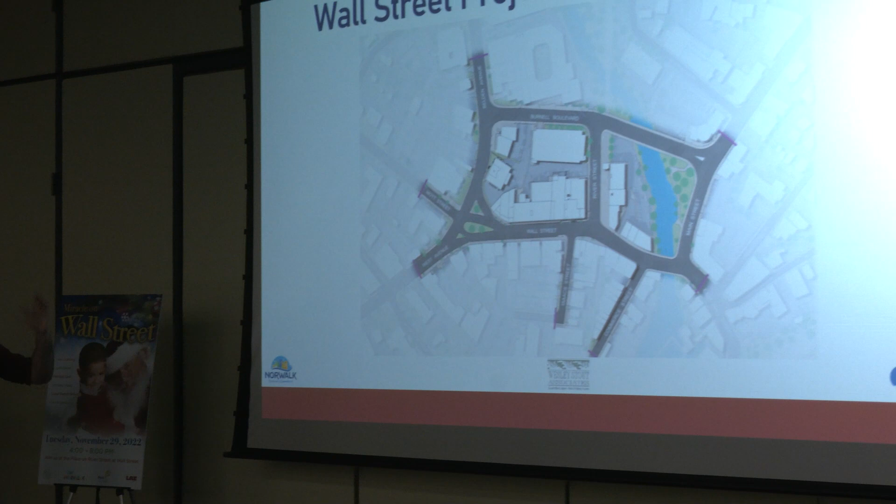On the screen you can see a project area, which might be familiar to some. For those of you that are new to the project, you'll see that this project is all about the greater Wall Street neighborhood and area. So on the left side of the screen, you'll see Belden Avenue and Wall Street. And one of the intents and goals of this project is to improve the intersection that's right outside of this library. That's challenging for many, many reasons. The project itself includes the entire corridor of Wall Street.

And also Burnell Boulevard. We recognize that Wall Street is one of the major east-west connections across the Norwalk River and one of the city's major east-west connections. So as part of this project, not only are we going to strengthen that, but we're also going to look at how we can incorporate Burnell Boulevard and bring it back to a two-way roadway to improve connectivity and mobility throughout the city. On the right side of the screen, you'll see the project incorporates a portion of Main Street between Burnell Boulevard and East Wall Street. And that's the area around Freese Park as well.

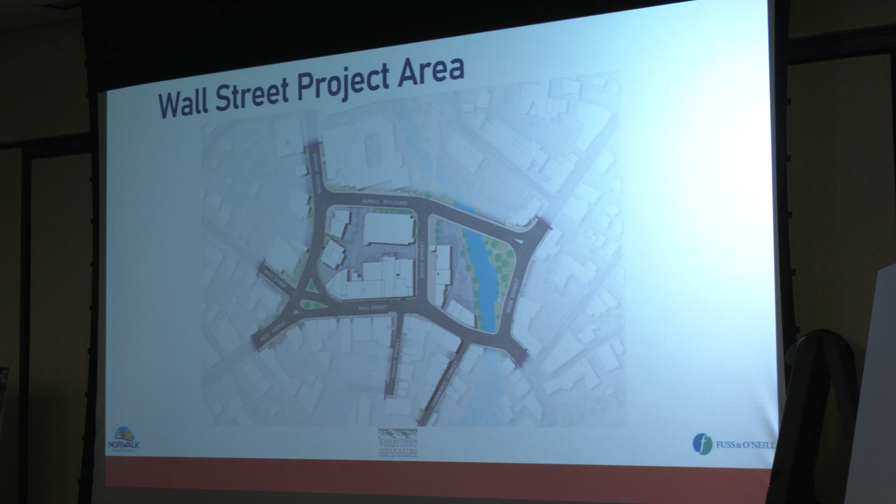And then you'll see some of the other roadways. We'll talk a lot tonight about the potential of River Street, also transformational improvements to Isaac Street, and we're also looking at basically from the train tracks all the way up Commerce Street to the Wall Street corridor. But before I move on from the slide, I did want to just talk about the history, which many people have elaborated on. When I joined the city, it was really interesting to find out that there were a number of plans done for the Wall Street neighborhood and corridor. As far back as 1986, there was a business district plan, and then it seemed like every 20 years there was a new plan. In 2003, there was a Wall Street area plan, and then as recent as 2019, there was a West and Wall neighborhood plan.

But I really wanted to emphasize that this time is really different. We have the support of the mayor, of the city's administration, our council members, and through that we've got funding to actually create design plans to hand over to a contractor. You're here tonight to provide input into what will be a shovel-ready project at the end of this process, which will conclude next year. One of the other things that makes it really different is just the amount of public engagement we've gotten. It was so fantastic to see the turnout. We had over 350 people at the Wall Street Theater, the first public meeting. And we've continued to solicit feedback throughout the process, but the energy from residents, business owners, and stakeholders has really been unparalleled.

And I think that's got the attention of a lot of different people, because you can't do this without money. So I just wanted to thank Senator Duff for bringing $3.5 million of state funding, which will be the first portion of the design plans you'll see here tonight, and that will help improve the intersection right outside the library and also make Burnell Boulevard potentially two-way to accommodate traffic throughout construction. Right? But there's also a lot of other funding. This project and this energy from the community has brought forward an endorsement from our Council of Governments that oversees Norwalk, WestCOG, to solicit another $4 million for transportation capital improvement funding.

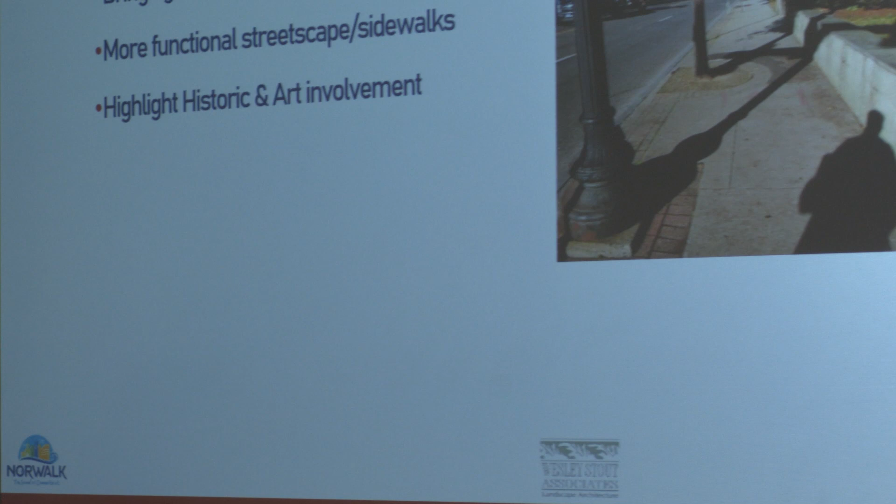So really quickly, I just want to talk about some of the larger project goals. You'll see a number of them tonight, and you'll be able to discuss a number more with our development team. But we really heard at the last meeting that everyone really wants to build on the strengths of Wall Street. So we know we have a really strong existing core group of businesses. There's many new businesses that have been opening to the city.

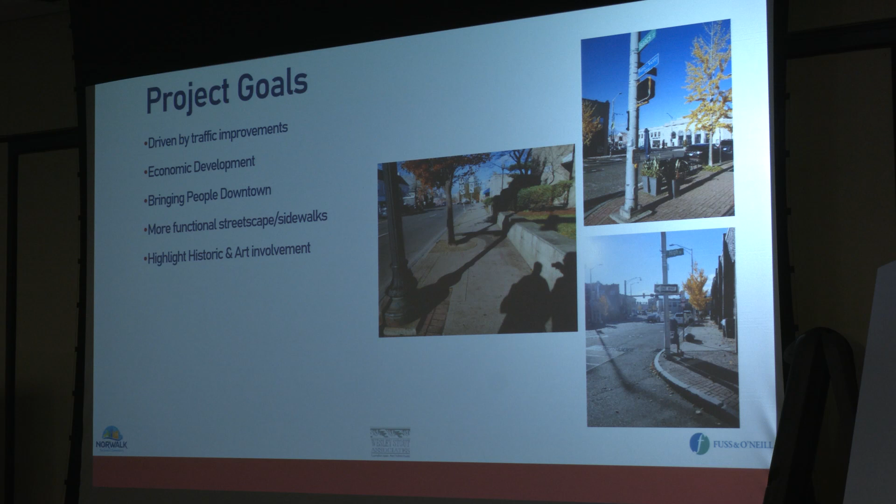And as part of this project, one of the major goals is really strengthen parking around those businesses, access, mobility, connections to those businesses, and really create space on the streetscape, right, on things like on-street dining and wider sidewalks.

Some other things that we know, the area has really great bones. So anyone that's familiar with this neighborhood will know the great public buildings we have, such as the library, which we're in tonight, other historic buildings like the theater, and then also the great open spaces we have like Freese Park. And another one of those major goals of this project is to really strengthen and build upon the assets that we have.

Another major goal of this project is really to look at how we capture the unique sense of community and spirit within the Wall Street neighborhood. Just walking the streets, talking to business owners, it became evident really quickly that this needs to be a regional destination and an attraction, and we really want to create a project that strengthens that core.

And lastly, we're transportation guys, so we understand there's a lot of challenges improving not only the through-flow traffic at safer and more village-like speeds, but also a number of other improvements at intersections and the streets along the corridor.

So you'll be hearing from a number of representatives from our team. There'll be about 6 or 7 or so speakers, so I won't go into details right now, but I did want to recognize the TMP team, Transportation, Mobility, and Parking team that's here, and that will be at the breakout sessions. Everyone from our principal engineers to our traffic signal techs to our planners will be at your disposal to talk about the project later on.

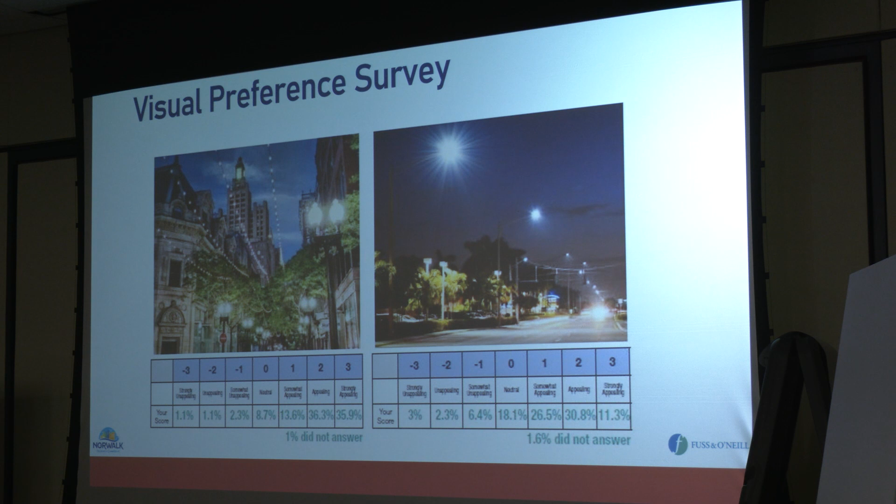So we asked folks, how do you react to things like this? Do you want to see this or not see this in your community? Whether it's cobra head sort of highway lighting, or whether it's more traditional downtown placemaking lighting. And we gathered those responses, we went through those and sorted through all those. So the charrette inputs, visual preference surveys, talking with staff, looking at all sorts of data. I want to boil it down to 8 slides. What did we hear from you? Because it's going to affect the design you see tonight that we want to talk with you about. So what did we hear?

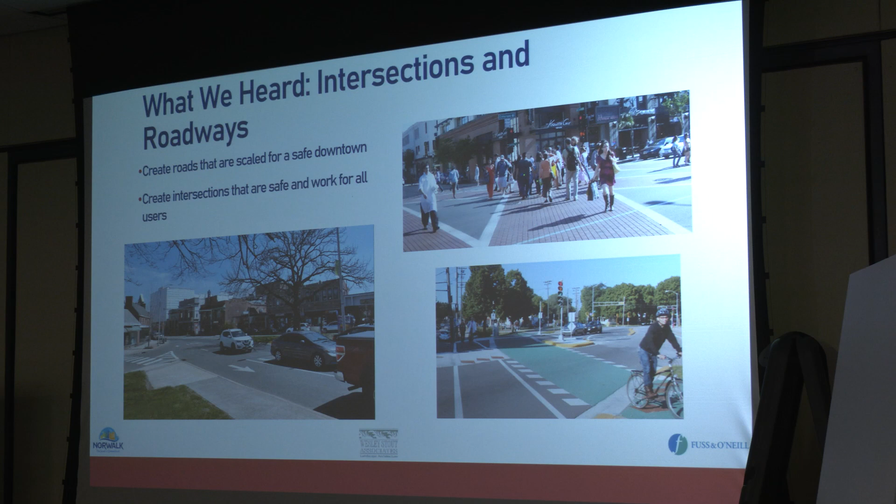Intersections and roadways. Create roads that are scaled for a safe downtown. Comments about highway scale and high speeds and not being conducive to walking or other uses. Create intersections that work for all different user types was one piece we heard. What we heard about parking. Provide adequate on-street parking for customers and visitors. It's an important part of what makes a neighborhood work. But many people don't like the existing angled parking spaces, was another piece of feedback. And then create direct, safe connections from parking facilities that already exist around the district to business areas and attractions. Because right now those connections can be indirect and feel unsafe.

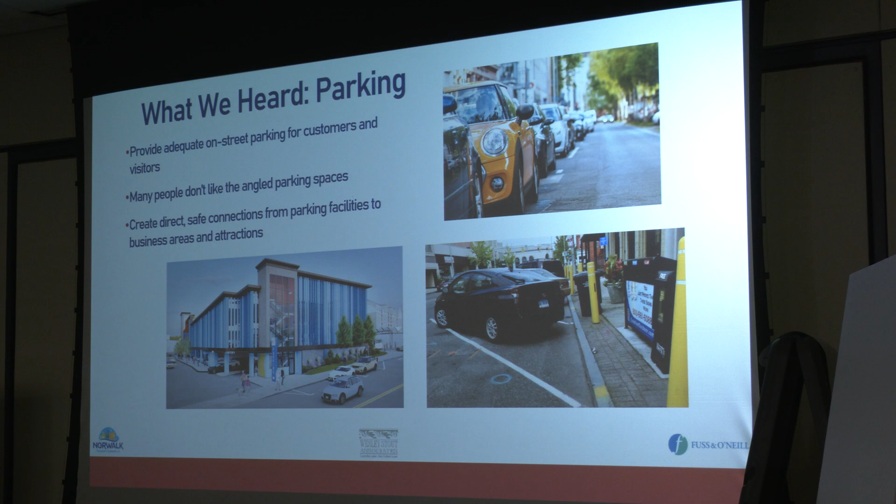Walking and biking routes, what we heard. Connect existing pathways. You've got all of these things that come into your project area, but it's not necessarily straightforward how you connect through the project area. Improve sidewalks, so they're great places to walk, but also so they accommodate outdoor or sidewalk dining. Connect existing bike trails and routes. Again, you've got some great regional systems coming in, but it's often not clear how you make through connections and bring people through. And provide safe spaces for bikes to move through the project area. We also heard about transit facilities.

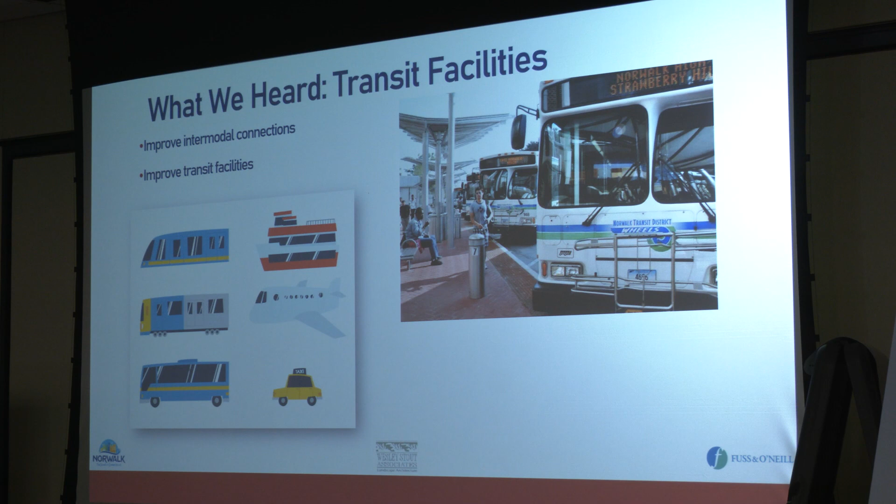Improve intermodal connections, whether that's cars connecting to bus, connecting to all sorts of different ways of travel, but improving transit facilities so folks can take mass transit easily. Gathering and event spaces. This is what we heard from all those comments. Create a major public gathering space that can be closed for events and celebrations so that there's a large scale way for Norwalk to gather and celebrate and be together.

Enhance Freese Park and the connections to it. It can be tough to get to and tough to get through. And then intersections as small gathering spaces. It's not just that there's one space that you get together, but there's opportunities outside of storefronts. There's opportunities at intersections for people to sit, to gather, to connect with each other.

The phrase that I like is that we did our homework for traffic research and analysis. And what we heard was that there's this dual nature of Wall Street. It's a major east-west thoroughfare. There needs to be safe throughput of vehicles. But it is possible to balance high vehicular traffic with throughput with more complete streets that accommodate pedestrians safely, bicycles, other means. And it is a connector north of 95.

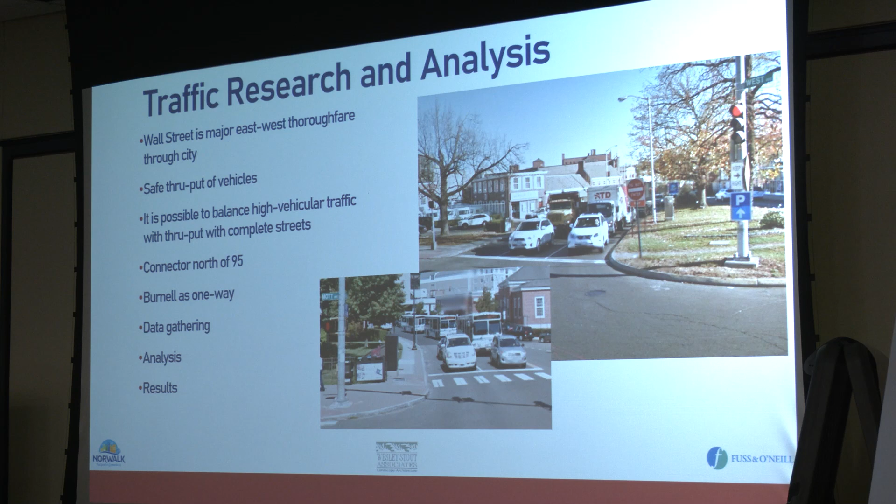The river is a major factor in the city, and this neighborhood is where east-west traffic moves through. And so as Garrett said, you're going to hear about Burnell as currently one way, and what are those options for increasing that east-west connectivity. So out of that, what we heard from you, we put together some design goals. I'm going to show you 2 slides of the sort of undergirding philosophy that is going to lead to what you're going to be looking at tonight.

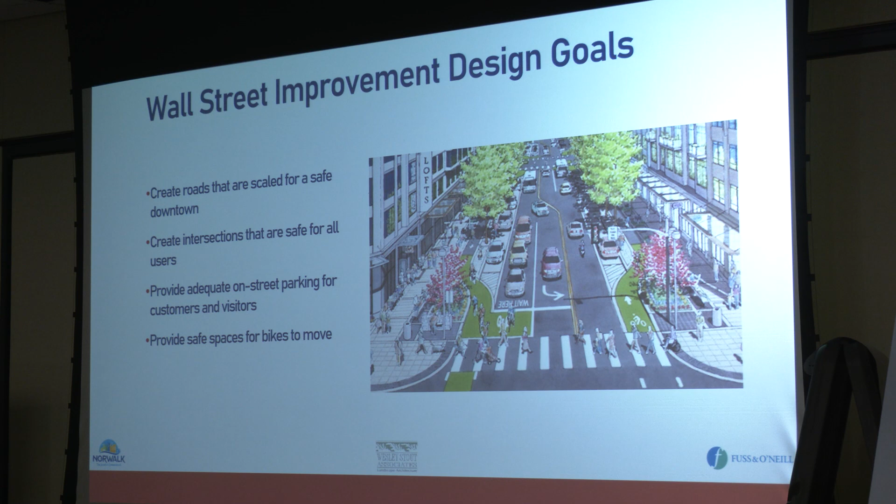So create roads that are scaled for a safe downtown. Create intersections that are safe for all users. Provide adequate on-street parking for customers and visitors. And provide safe spaces for bikes to move through and in. Improve sidewalks as great places to walk. Create spaces for people to gather. Accommodate outdoor sidewalk dining.

Respect the historic context, and integrate the vibrant arts culture, which we've done by putting Garrett next to this super cool bike rack with I Love Wall. I don't know how he built that. He welded that all by himself to get that together.

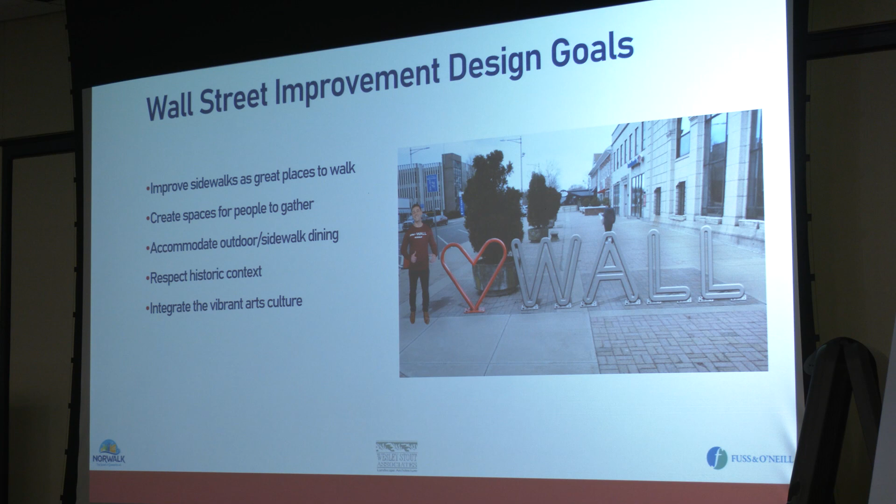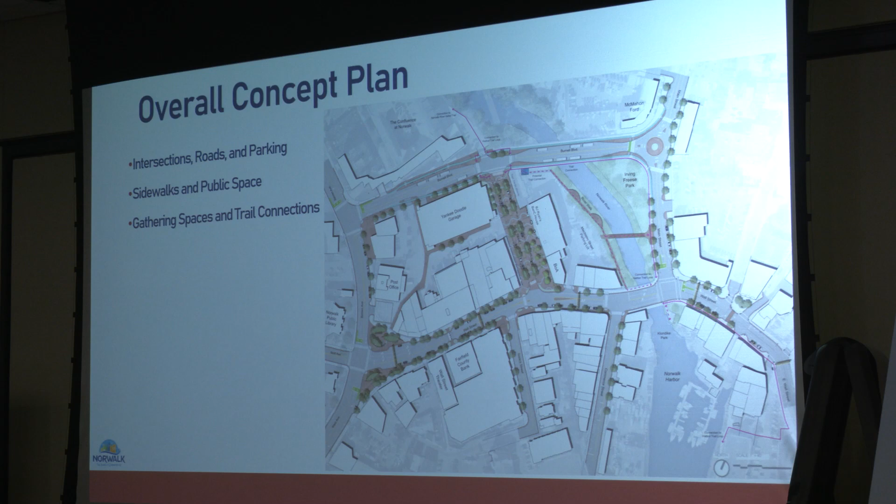But these design goals sound like mom and apple pie. They're all fantastic. But physically putting them into the landscape is the challenge for any project. So what you're going to hear next from our design team is what do those things look like specifically out in this neighborhood, out in Wall Street. There you're going to see an overall concept plan, and we're going to break it down into 3 major categories: intersections, roads, and parking, sidewalks and public spaces, and gathering spaces and trail connections. So with that, I'm going to turn it over to Johnny.

Thanks, Arnold. Again, I'm John Guzzi. I'm a senior transportation engineer at Fuss & O'Neill and leading project manager for the team. As Arnold mentioned, first and foremost, I'll be talking about intersection, roads, and parking, but really from the curb line in. We're going to be utilizing the analyses that we performed in the last few months, and certainly the feedback that you all provided back in June.

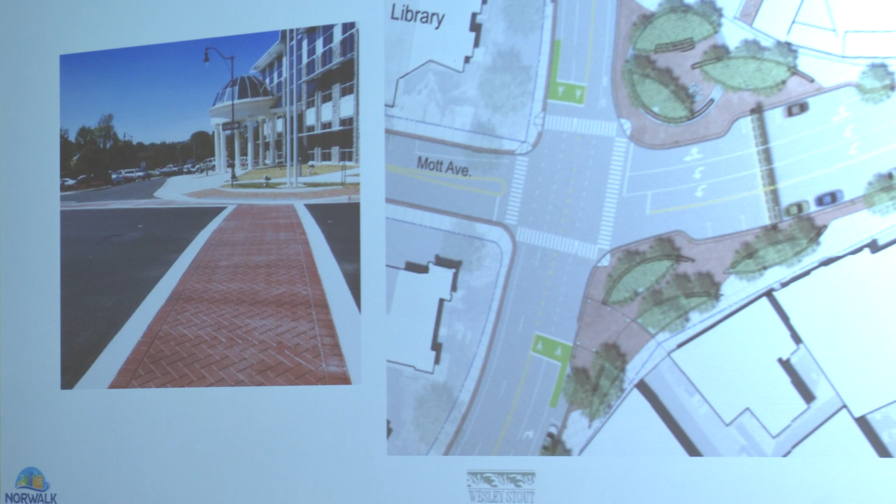First off, I'll take you on a tour working along the project area, and we have the main intersection right outside here at Belden, West Wall, and Mott. As you see, we know that this intersection has a lot of vehicles, buses. There's a lot of volume coming through this intersection. So, as mentioned before, balancing the vehicle with the pedestrian is key.

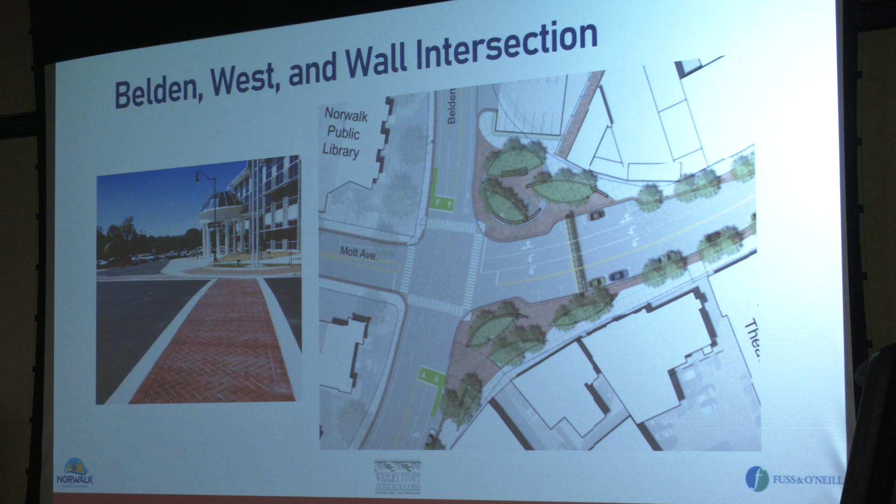With the current configuration, we understand that Norwalk has a historic trolley configuration, what's out there today. But we also heard that pedestrians often struggle to cross Wall Street. They get trapped in the medians. Their head is always on a swivel. There's various conflict points. It's inaccessible.

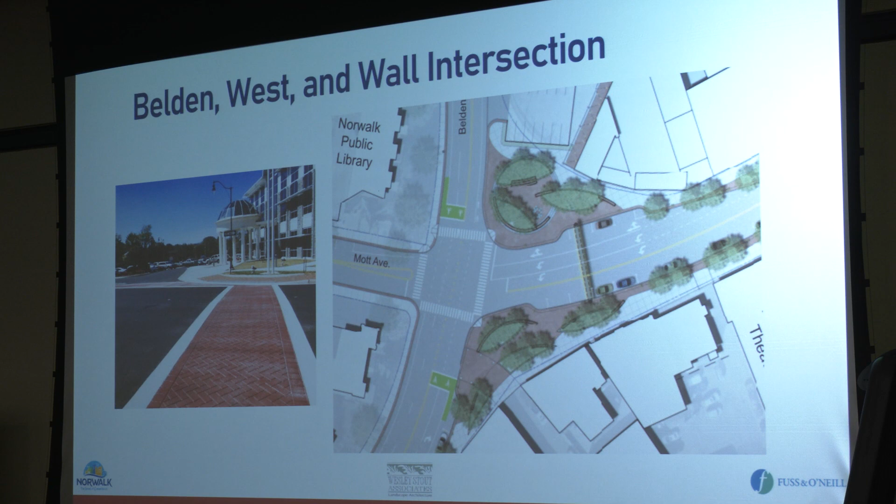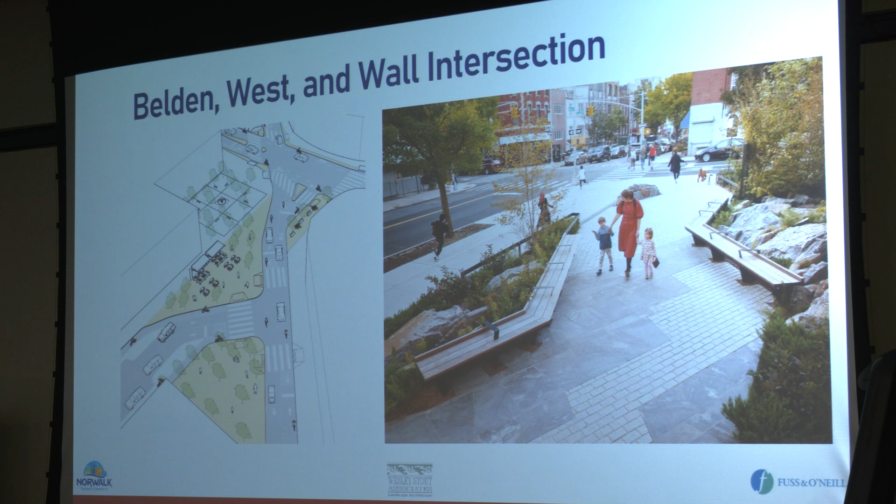So it's very daunting. With an intersection like this, that's more modernized, shrinking it, reducing it, that enables increased safety for pedestrians. The crosswalks are shorter, they're better aligned, they're well delineated, and in doing so, it creates that increased safety. Such examples have been implemented elsewhere, and things outside the curb lines give opportunities for more pedestrian plaza space, which Tom and Wes will talk about in a minute.

Moving forward, in terms of the Wall Street corridor, the heart of the project, this area is where we had to really balance the volume of vehicles with pedestrian safety. We want pedestrians to feel comfortable. We want businesses to thrive. By doing so, you want vehicles to go slower.

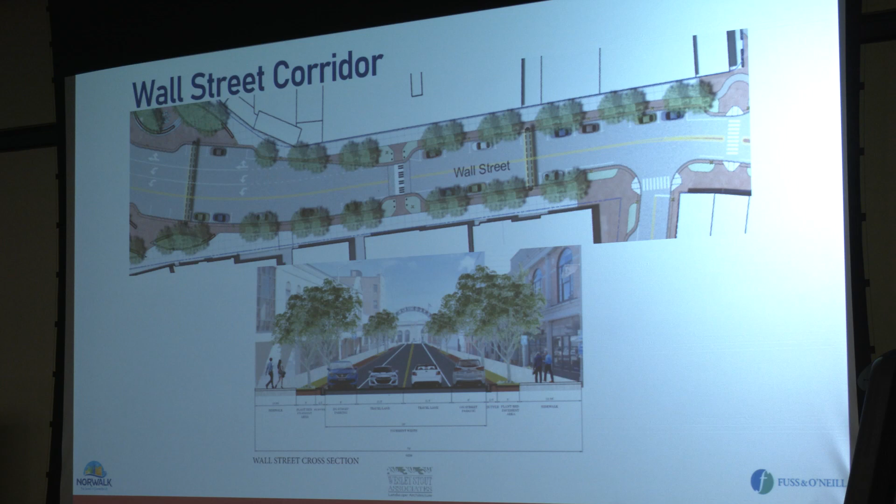So implementing a true road diet by bringing in those curb lines in several feet enables that to happen. Implementing traffic calming measures such as a raised crosswalk adjacent to Wall Street Theater is another crucial element. All this has to be done also with on-street parking. We heard back in June how crucial that is, both for the businesses to thrive on the deliveries and for their customers. So here shows a cross section of the reduced area at Station 2. We can certainly talk more about that.

Moving forward to the intersection of Main and Burnell. I won't go too deep into the layout of the roundabout, but this is another configuration that promotes increased safety, better traffic flow and operations, lower speeds. Roundabouts help with maintenance costs, operations, lower emissions. So there's so many benefits to the roundabout here, but the key element is, when Burnell transfers to a two-way operation, it helps that flow and transit of vehicles get out of Burnell.

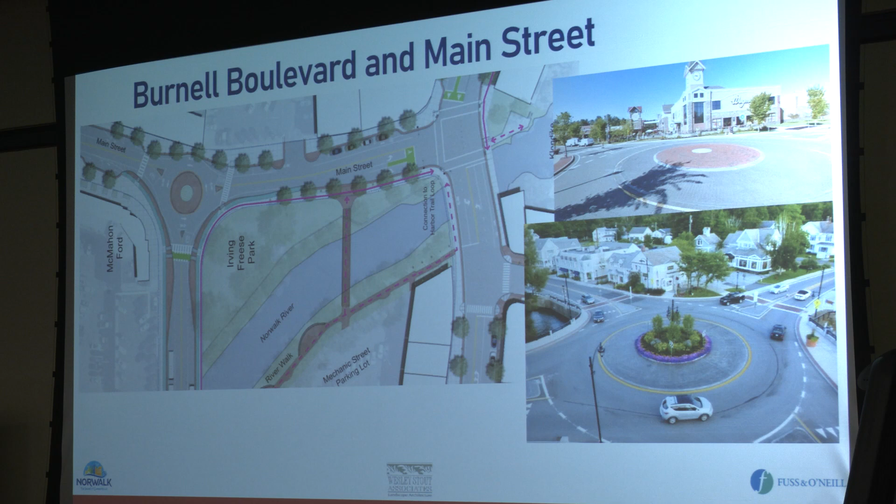What it also does is, you noticed on the last slide with Wall Street, due to the balancing game of vehicles and pedestrians on that sidewalk space, the on-street bike facilities are now going to come from East Wall up Main to Burnell. That helps take that left-hand movement and create that pedestrian cyclist corridor, mobility corridor. And leading into Burnell, the space that was there enabled us to have a state-of-the-art, modern, progressive, safe feeling for off-street separated bike facilities in both directions.

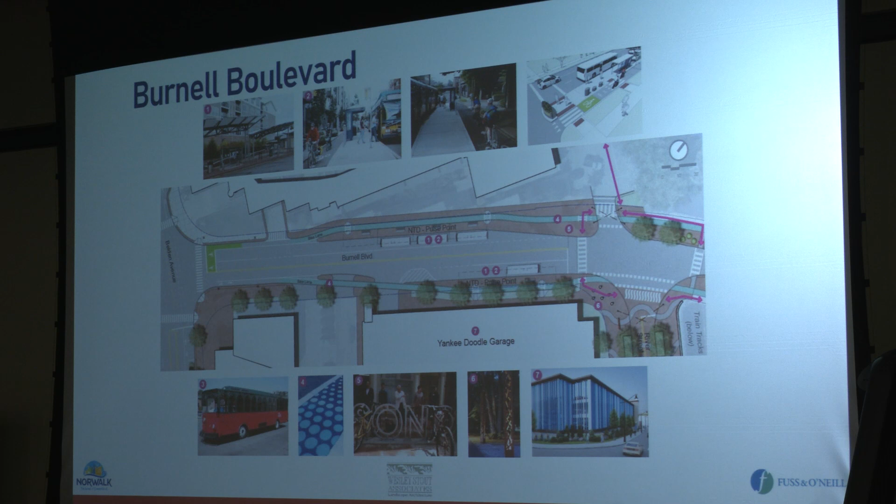And it is suited well, it's next to the NTD, the pulse point, so everything within this area combined with the raised intersection that Steph will talk about in a minute at River and Burnell creates such a good placemaking feel here. Quickly before I turn it over, Burnell with the two-way, it's been stated before, it's going to alleviate traffic on Wall Street during construction. It can help with alternatives during that staging. So there's so many benefits here, and we're super excited. We have a quick cross-section also to show what these facilities potentially will look like in the future. But we're really excited, and I'll turn it over for everything outside the curb lines to WSA.

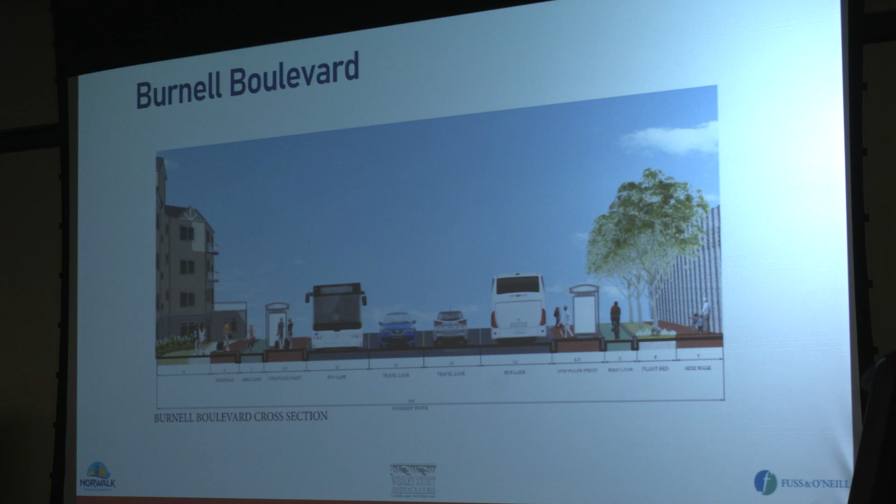Thank you, John. This is Tom Cross. I'm Wesley Stout. We're both from Wesley Stoutt Associates. John just did a great job explaining what he talked about as the public roadway, sort of curb to curb. Our responsibility is really the curb line to the buildings or the open spaces adjoining that. So thank you, Jim, for setting the vision tonight, getting this tremendous public engagement process in place. Great to see all of you here tonight. And then Arnold did a great job of setting the stage for the discussion tonight, the goals, what you're going to be seeing, the opportunities to touch base with us all, see the different stations, get into the design in more detail, which we're not going to do in this preamble, but we will be here for the next 2 hours or so to get into that detail with you.

And then John, you did a great job of explaining the curb-to-curb experience. The great benefit of the roadway redesign is making this what I call a more modern roadway. These streets were originally designed for trolley cars. Everybody remembers the big turning radiuses at the intersections, the broad intersections, very difficult for people to cross, all sorts of challenges. But that was a roadway designed and put in place 100 years or more ago. What we're going to be talking about tonight is a modern roadway. A roadway that's built for people, built for cars, built for mass transit, built for bicycles, and really built for the community.

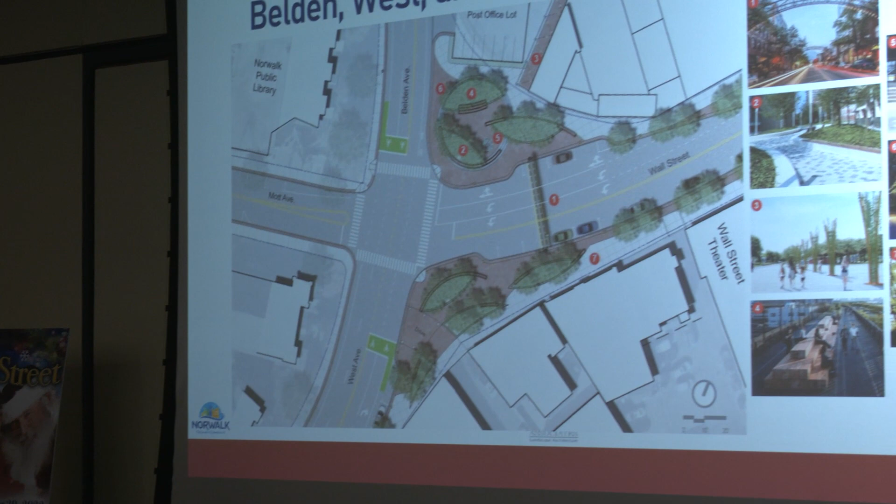We have a dramatically increased sidewalk zone in these plans. It's probably about 60% more sidewalk space within the redesigned roadways. Again, safer crossings as was brought out, narrower crossings, better spaces for circulation for cars, better linkages, better connections to all the spaces. So the one you see here is the intersection of Wall, Belden, and West. This one's been really a quandary for many years. It's very oddly designed because of the old trolley tracks, and I think it's going to get an entire new life. This will be the gateway to the new Wall Street proper, the future of Wall Street.

And with that, I'll say these last few words and turn it over to Tom. We're about halfway or more through the presentation, so we won't take you too much longer before we get to the stations. But I want to introduce Tom Cross from my office to explain some of the highlights of our plans, and again, we'll be here to talk. Thank you.

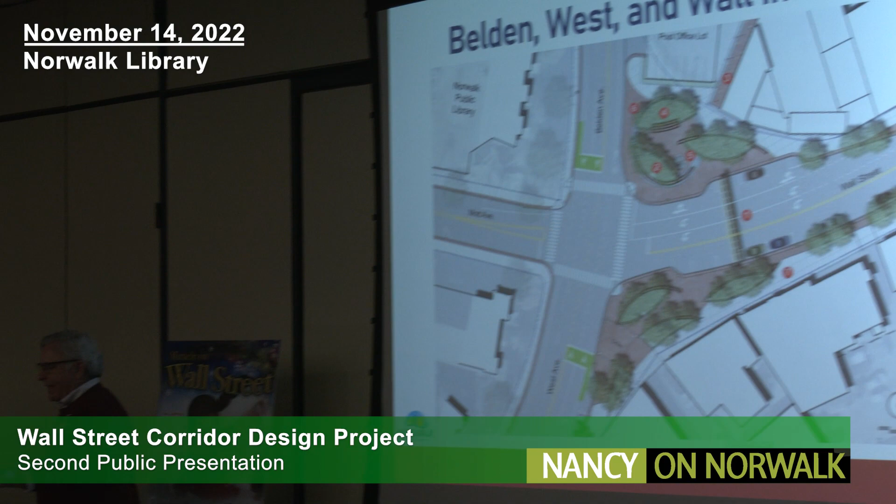Good. Thank you, Wes. Again, Tom Cross, landscape architect for Wesley Stoutt Associates. And like Wes mentioned, I'm going to try and hit some of the high notes on the curb to building design. And then we can go more in depth and more into detail at the stations.

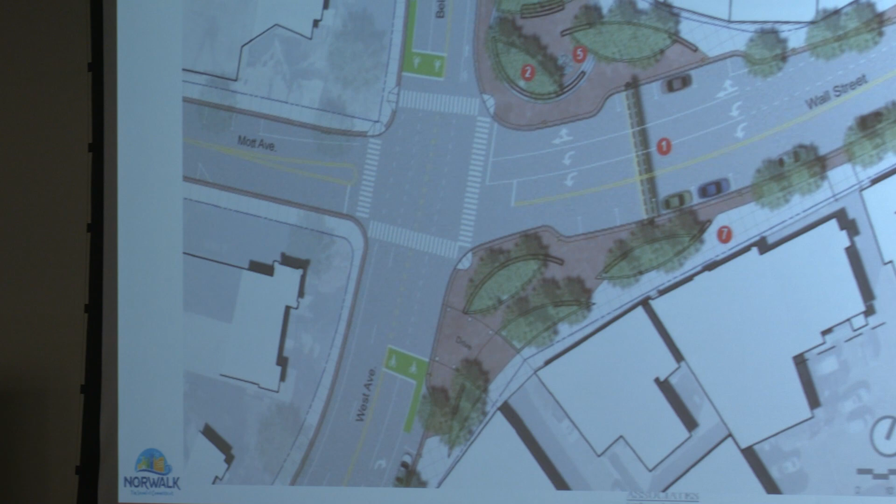The intersection at Belden, West, and Wall, that's the biggest infrastructure and roadway improvement that we have. And the realignment has created more public realm space from curb to building. The feedback that we received is that the community wanted more public gathering spaces. And we're creating smaller, more intimate gathering spaces at the intersections versus a larger gathering space that you'll see at River Street in a little bit.

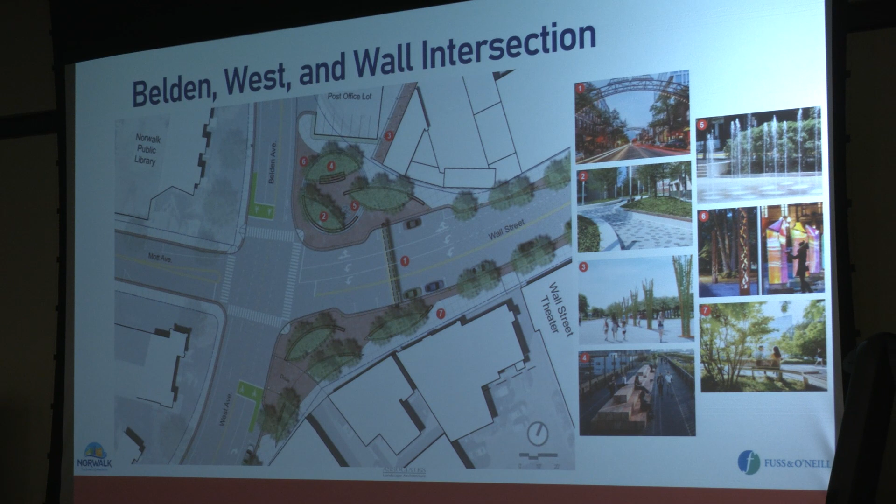These public spaces could be used for a variety of things: reading a book that you just grabbed from the library, having a bite to eat from a nearby restaurant, catching up with a friend, and more. The long arching and overlapping planters help define these intimate spaces and extend into some of the more narrow spaces as you get away from the intersection.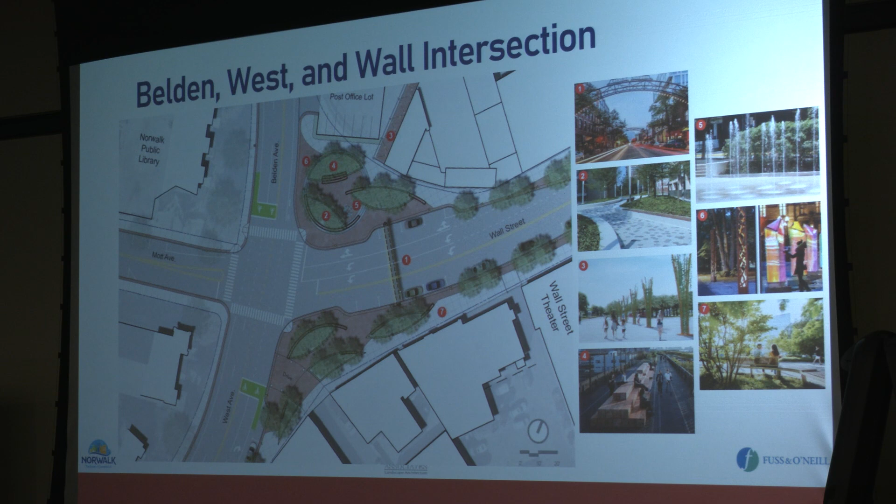The shapes are also reminiscent of the arching roadways that Wes mentioned that the trolley system used to use. These planters also help soften and frame the corners of the intersection as you enter that gateway and arrive to Wall Street. And speaking of gateways, these are the iconic gateway arches that we're proposing as a part of the concept design. Our goal is to create something iconic and memorable, create a gateway into this revitalized district, and most importantly, create a sense of identity for Wall Street.

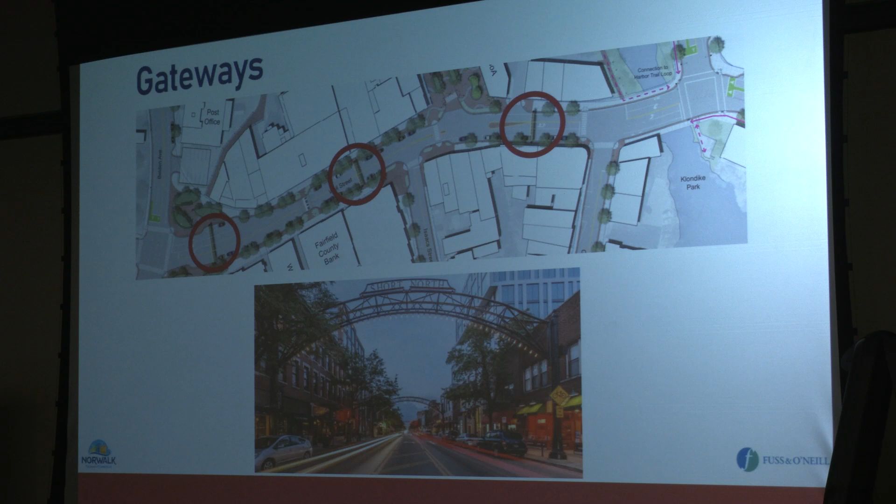The plan on the screen is showing 3 arches, but in total there'll be 5. There'll be an additional arch in between River and Commerce Street, and there'll be a 5th one on East Wall. So we talked about the arches, and now I want to talk about a more pedestrian scale feature of the Wall Street streetscape. As you can see on the left, that's one arch, and then further down over here, that's the second arch. But streetscape, what is streetscape?

Like we were talking about before, it's everything between the curb and the building. So it's trees and plantings, it's lighting for safety, it's green infrastructure, improved crossings for safety, benches, bike racks, public art, and more. The existing streetscape conditions, Wes alluded to it, but on average they're about 10 to 12 feet in width. That's the pedestrian zone. And the proposed concept design is making them about 20 to 22 feet wide, and in some cases greater. That's not accounting for the corner plaza areas. That's the Wall Street corridor.

This gives us plenty of room for the much needed outdoor dining that was asked for in the feedback from the community, plus more. In the plan, you can also see character images above of some of the streetscape elements, and you can start to imagine what the new Wall Street corridor is going to look like.

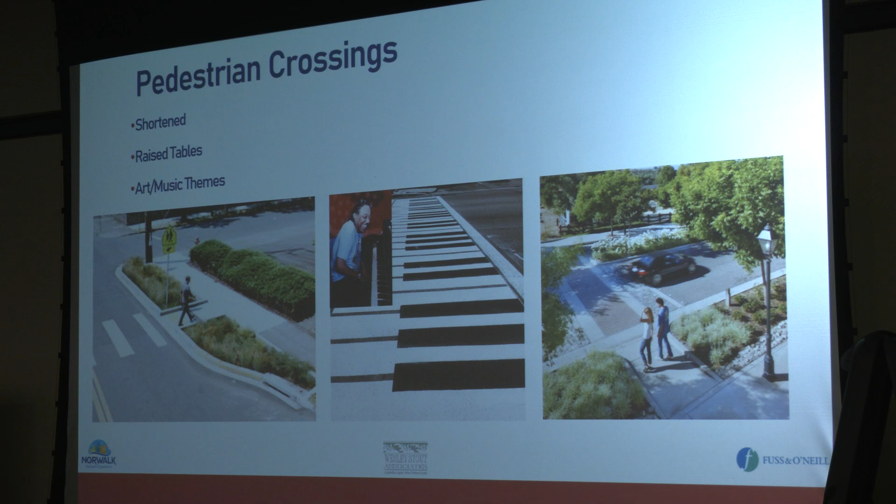The image on the right also illustrates a raised table and raised crosswalk conditions that we could talk about in more detail. And then the center image is of Horace Silver, who's an American jazz pianist who was born in Norwalk, and actually in the Wall Street area, I've been told. And if I go back, you can see that piano keyboard in the middle of the plan. That will pay tribute to Horace Silver and also tie into some of the historical context.

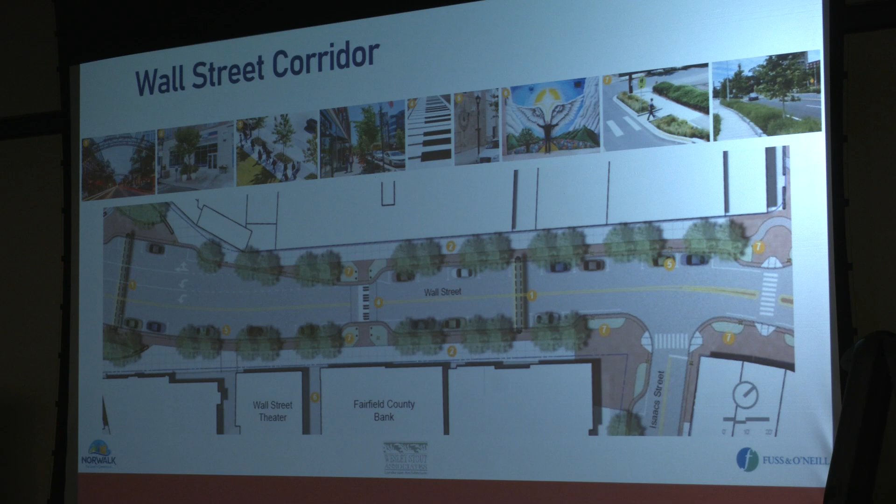Next is some lighting and street tree images. These are examples of the streetscape I was talking about to help improve the character and overall safety of the neighborhood. And then historical context, as I was alluding to, the designs focused on modernizing Wall Street and the area,

but it also pays respect and incorporates historical elements, such as the piano keyboard, as well as we're thinking there's going to be reclaimed materials, old trolley tracks and bricks that we could repurpose as a part of the design, as well as using street lights that are historically inspired, as well as a trolley circulator that could bring people to and from the Wall Street area and other parts of Norwalk, and also an idea of illuminating the historical Wall Street Bridge.

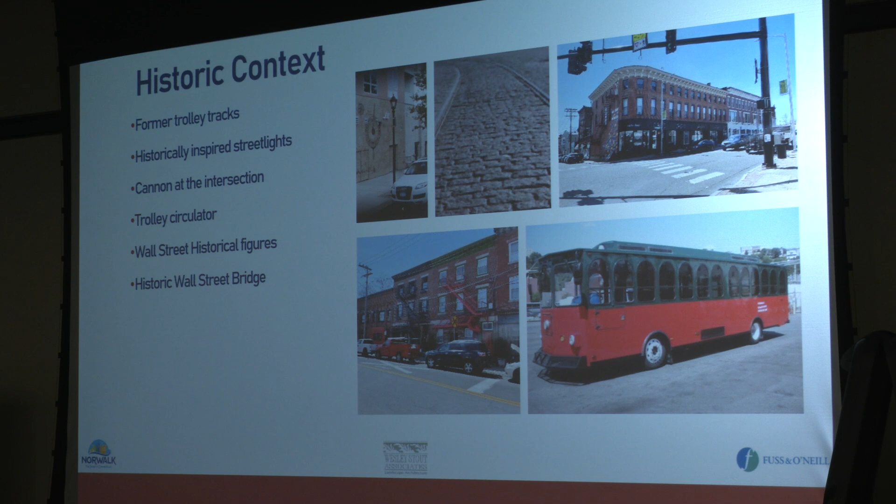Lastly, before I turn it over to Stephanie, arts and integration. Arts and culture are already a vibrant part of the neighborhood fabric, and we're looking to build upon that theme. There's many opportunities, as you've seen, the wall murals throughout the neighborhood. There's always room for more.

Hello, everyone. My name is Stephanie White. I'm with Fuss & O'Neill. And the next series of slides I'm going to walk you through are more of the remaining pieces of the pedestrian enhancements to the project. And what I'm going to walk you through is how we can enhance and strengthen connectivity. Connectivity in terms of connectivity to the Harbor Loop Trail, to Freese Park, and to Yankee Doodle Garage.

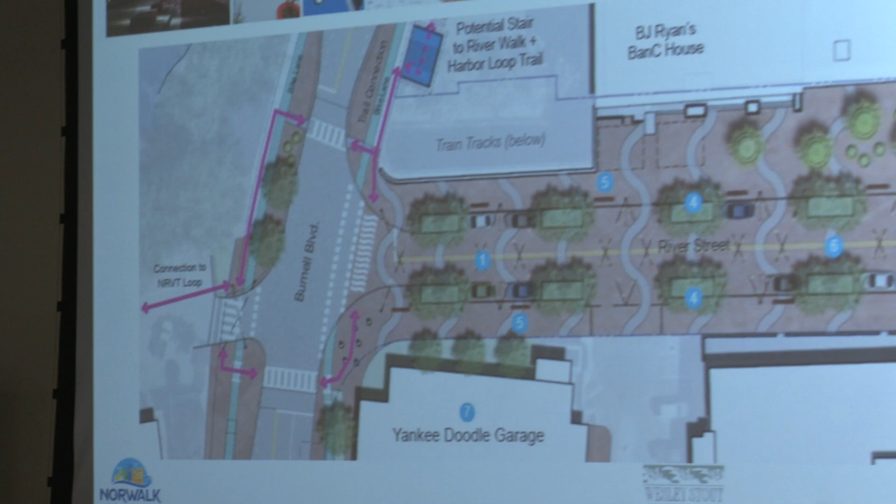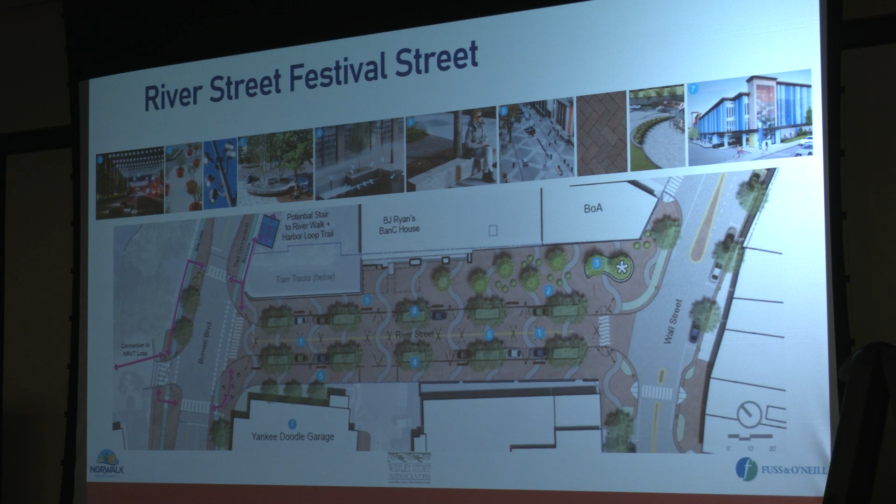So to start, River Street. So how could River Street look like a festival street? So what we would be doing is removing the curbs, removing the asphalt, removing the double center yellow line, and reimagining it as a flat plane, almost like a plaza-like feel. You would have textured pavement coming through building face to building face, and that would really create more of this pedestrian-like feel. You can see here we've imagined some playful forms on the ground plane, harking back to the river and the water movement, as well as providing overhead string lights to enhance that really festival-like feel.

Another resounding yes that we heard from the public workshop on River was greening the corridor, having more street trees. It was very bleak. There are some challenges with River Street in terms of there's some structure underneath that doesn't allow us to plant trees right at grade. But what we're looking at is, oh boy, that was not the right one, how we can incorporate raised planters that would have bench seating in them, and that would allow for street trees to be planted. And that would be in this area where we have some challenges with structure underneath, so raised tree planters here. But then we have opportunities to have in-grade planters there as well.

Additionally, as John had mentioned, in terms of connectivity, the intersection where River meets Burnell would be raised. And what that does is really enhance the connection to the Harbor Loop Trail coming out from here. Now you have much more bike mobility access to River Street. Additionally, behind River there are these dead ends, and we want to remove those dead end spaces. And the idea would be creating this grand staircase with lots of lighting and an inviting appeal to bring you down to the river.

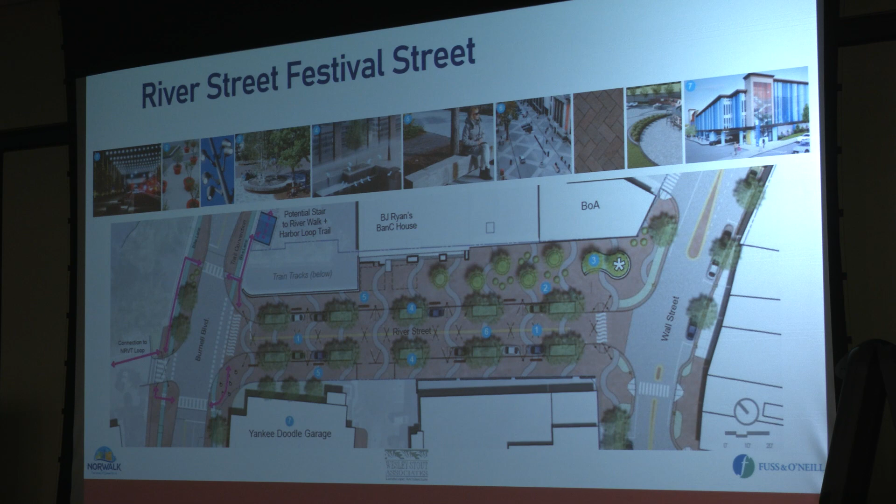So how does that look in cross-section? So this obviously wouldn't be just a pedestrian type street day to day. It would still function as a street, and that is known as a shared street. It's a relatively new term in the US, but in Europe they've been doing it for hundreds of years, where the vehicles and the pedestrians all share the street. In the US right now, our street design, roadway design is really auto-centric. It's all putting the vehicle first. A shared street reverses that, putting the pedestrian as priority and making accommodations for the vehicle.

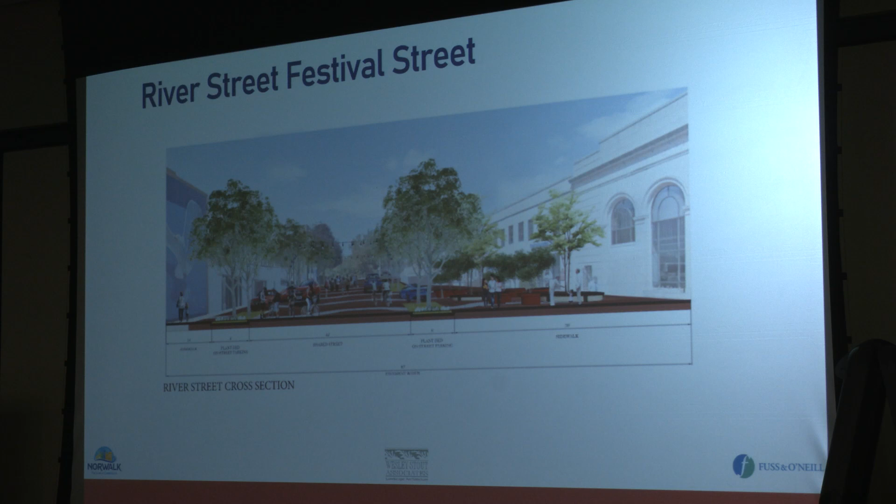So you can see here, the cars can still traverse through River, and that is done by using vertical elements to delineate where the car goes versus the pedestrian. So where the street trees and the light poles would be, that's where the travel piece would be for the cars, and there would be on-street parking in between those tree planters.

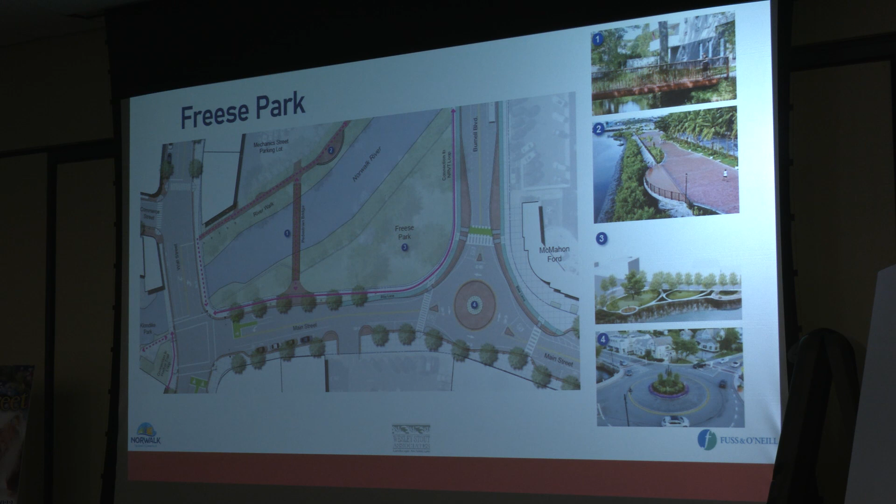Then moving on to connections to Freese Park. And here we're looking at creating a much stronger connection to Freese Park from River Street. And the idea would be creating a pedestrian bridge, like you see up the top here, over the Norwalk River. A lot of developments have kind of turned their back on the river. The river is a wonderful asset. We really want to embrace the river more and bring people to it.

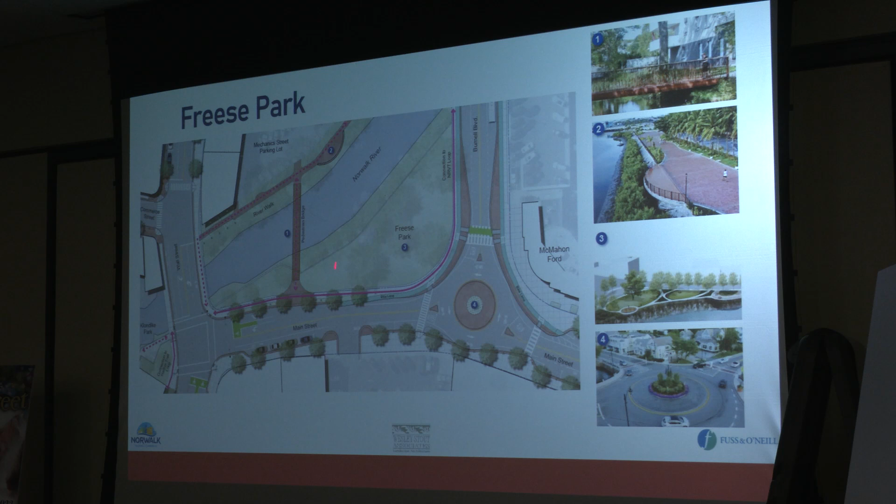And doing so, we would create this river walk along there. There's a small sidewalk along there. We would look to widen it, add lighting, create bump outs, this sort of esplanade-like feel, and creating that connection back over to Freese Park and really activating Freese Park much more than it is today.

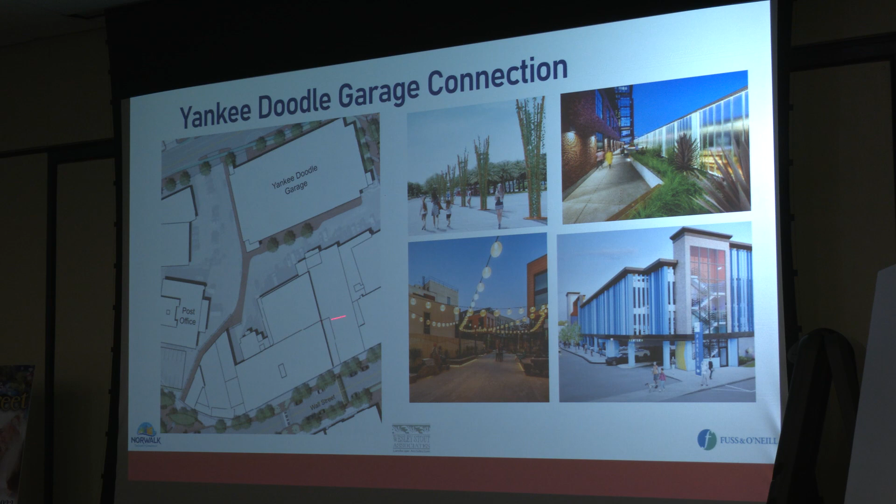And this would have the festival-like string lighting. It would feel safe, it would be brightly lit, and it would be a very wide pedestrian corridor spine that would get you to the Yankee Doodle Garage. And with those Yankee Doodle Garage improvements, we're going to be enhancing the pedestrian sidewalks along here, so it will be a much easier and more pleasant experience getting from Yankee Doodle Garage to Wall Street.

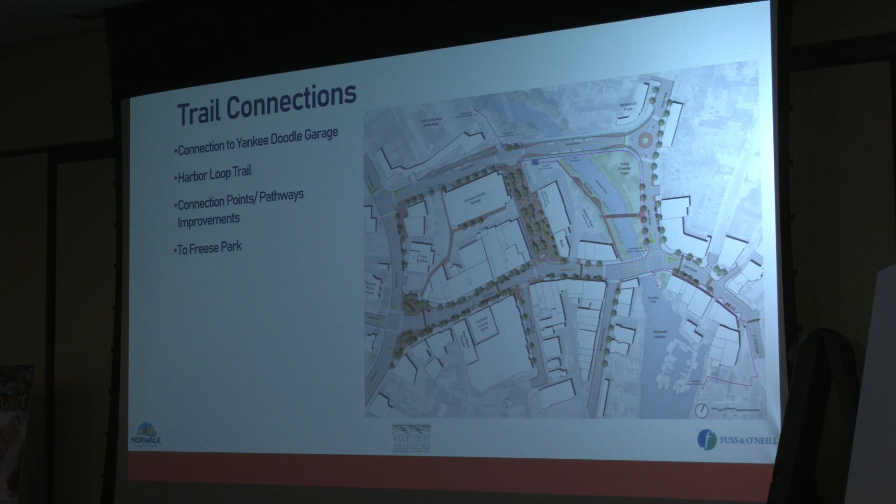So to summarize, those connections are really enhancing and strengthening our connections to Yankee Doodle, to Freese Park, and to the Harbor Loop Trail. So with that, I'm going to turn it back to Arnold, who's going to give us the rundown on how the station breakups are going to work.

Thanks. Yeah. So we recognize that as we run through this design, which has so many elements to it, we can't tell you everything in one presentation. And we learned a lot at that first workshop about the value of talking with you one-on-one and getting your inputs and your feedback and collecting those pieces. So how do we proceed for the rest of the night? We're going to be having 4 stations around the second floor of the library where all of the project staff will be available for you to ask us questions, to talk with us.

So in the children's section, which is where you checked in at that table, it's right behind that table. There's going to be 2 stations. There's an overall concept design station and project questions, which I'll be working at with Mark Bertucci from our staff. And that's if you have general questions to ask, want to get the big picture or find out which station to go to, you can start with us if you like. We're always there to ask big questions of.

Station 2 will be in the children's activity room. We won't make you sit in small children's chairs. You'll get to stand up. And that's where, if you want to talk to the team about what happens curb to curb, the intersections, the roads, the parking, Johnny and city staff from TMP, from Transportation, Mobility, and Parking, will be there to talk through the details of those intersection designs, of the way Burnell will work, of the Wall Street corridor itself, and how that will all work from a roadway and traffic standpoint.